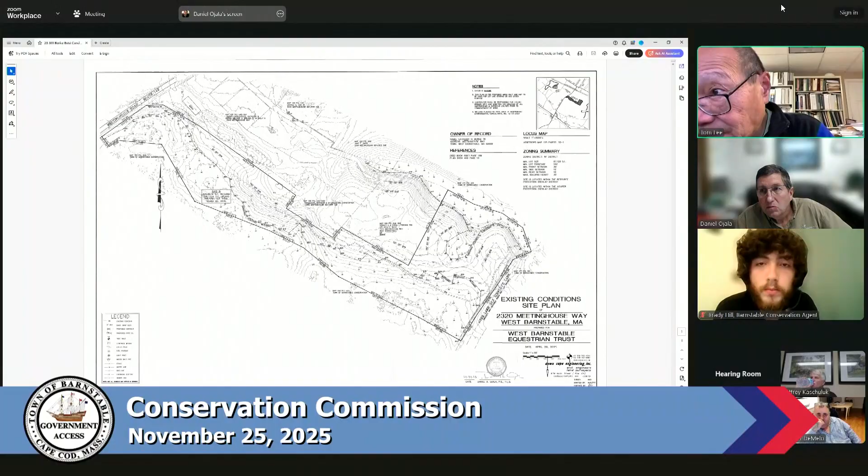Thank you. Any questions from the commissioner? None? It's pretty straightforward. Channel 18, any public comment on this one? Seeing none, could I have a motion to approve this project as a negative determination?

So moved. Second. Roll call. Abodeely, aye. DeMello, aye. Kaschuluk, aye. Lee, aye. Sampou, abstain because I was absent from this. Tangney, aye. So that's 5 and 1 abstain.

Thank you. Good luck. Excellent. I appreciate your careful consideration, and thank you.

We have 3 NOIs, and the first one is 207 Crystal Lake Road LLC to demolish existing dwelling and construct a new dwelling with all associated appurtenances and proposed pool at 207 Crystal Lake Road, also as shown on Assessors Map 139, parcel 054. John?

Good evening, John O'Dea from Sullivan Engineering Consulting, representing the applicants. I will share the plan with you.

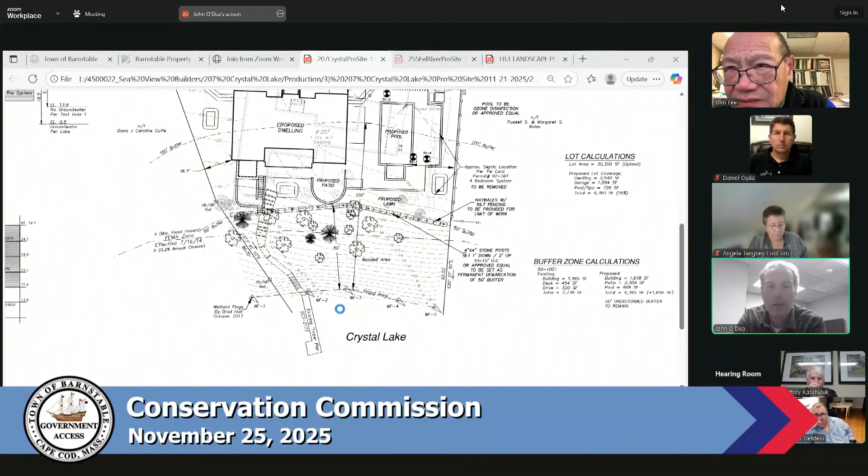As you stated, this project's at 207 Crystal Lake Road. It's a parcel of land, a little under an acre, that abuts Crystal Lake. Our wetland resource would be the land underwater body, and then an inland bank along it is what we took our buffer zone from. Site's developed with a single-family dwelling dating to the 20s. It's seen better days if you've been to the site. We have an undisturbed 50-foot buffer.

We're proposing to demolish the house, build a new house generally where the main box of the existing is, and a pool to the side of it, kind of generally where the existing garage's end of the house is. All work's outside of the 50-foot buffer. The existing undisturbed will remain. We've got a limit of work set up, drainage taken care of, pool disinfection specified. I hope that this is a pretty straightforward project for you all.

Thank you, John. John, I think I need a revised plan to show the dimensions, some of the building stuff. Right now there's nothing mentioned in there. We could give some overall pool and building dimensions to give a better scale of it. We did have all the offsets to the property lines to locate it, but we could certainly do that.

Okay, question from the commissioner, Angela. Yeah, I have 2 questions. One, you're not removing any trees, correct? No trees in the 50-foot buffer. There is 1 tree here where the patio is. So there is a couple of trees landward of the 50-foot buffer, but nothing within it.

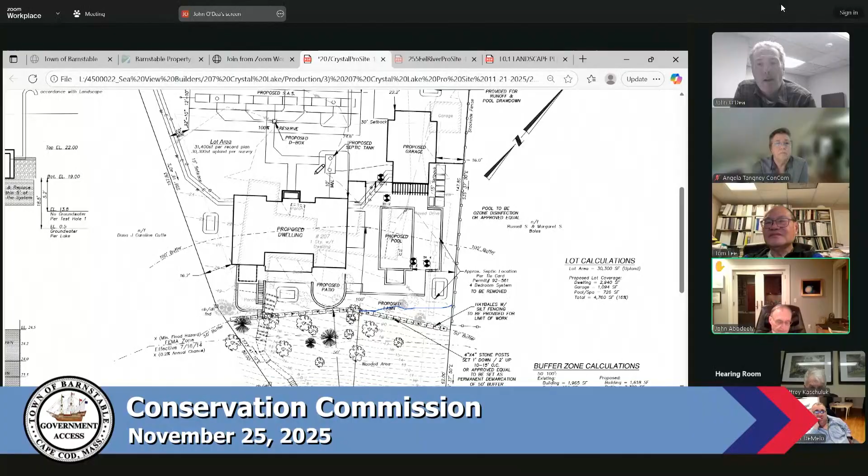So I'm a little concerned that you are literally touching that 50-foot, which should be demarcated, I assume. That is on the plan. And so I kind of agree with Angela. I think if there's some way to pull that back 10 feet or 5 feet at least, I think that would be necessary. I think we can certainly pull the limit of work back as we discussed there on that eastern side. Our excavation, heavy equipment or whatever, I mean, we're probably 20 feet past the limit of work.

There's a little bit of a patio arc there that's getting close to it, but I don't think that's digging a foundation or anything of those sorts.

So, then I need your assurance that there would be no intrusion beyond the work limit line into the 50-foot buffer zone, period, under any circumstances. Again, I'm not a contractor, but I just get a little concerned.

You put the proposed lawn right up to it, and the proposed patio was literally touching the work limit line. So I was just a little concerned with practically how you're going to do that without invading the 50. I think that's where I sort of think, Angela, that's kind of where you were going with your concerns.

Exactly, yes. Other than that, I'm okay with it.

I think that we could certainly reinforce your concern there with more than just the labeling, here's the hay bales. I think we could certainly put an additional note on there that there can be no disturbance beyond this limit of work. Right, because if they accidentally make a patio a little longer, it's in the resource there forever.

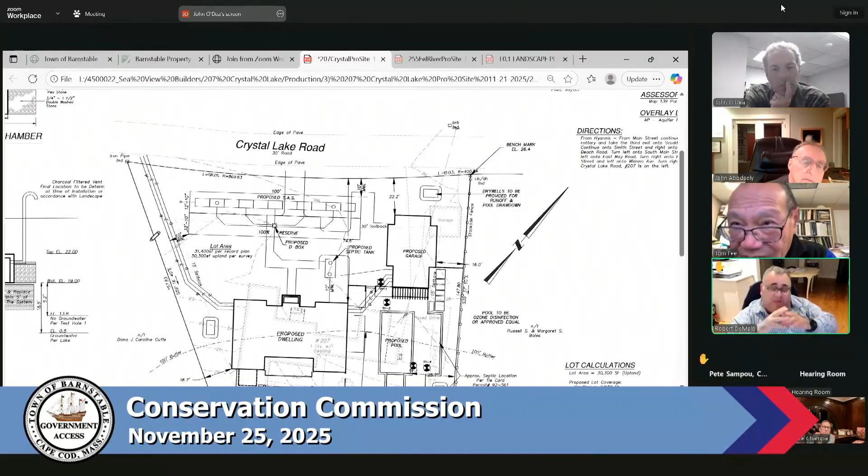It's all falling apart as you stated. But my question is, is there any way, I'm kind of repeating what everybody said, but can we pull that whole house and pool and everything closer to the road a little bit? Why does it have to be that much structure between the 50 and the 100? That's my only question, there may be a reason for it.

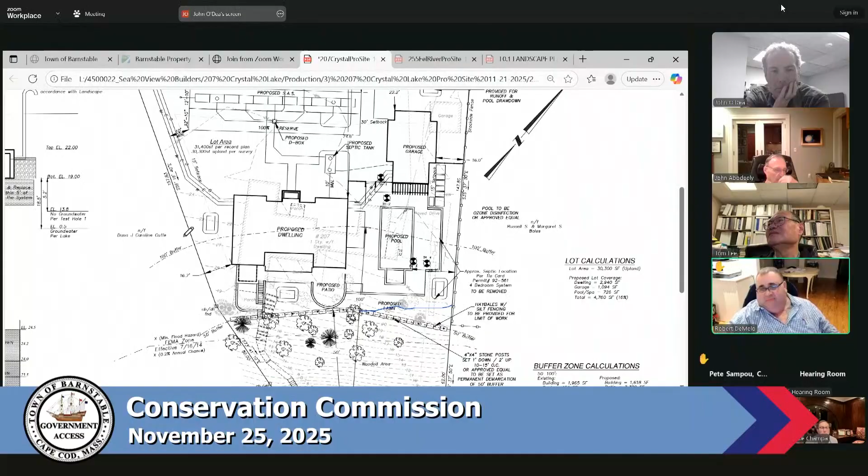The view, whatever it may be, but it's such a huge front yard, and we're pushing everything right up to the limit. I don't know, I think you could go forward 20 feet, because I was out there looking at it, bring the house forward 20 feet, the pool, the garage. I don't know, I'm just asking a question.

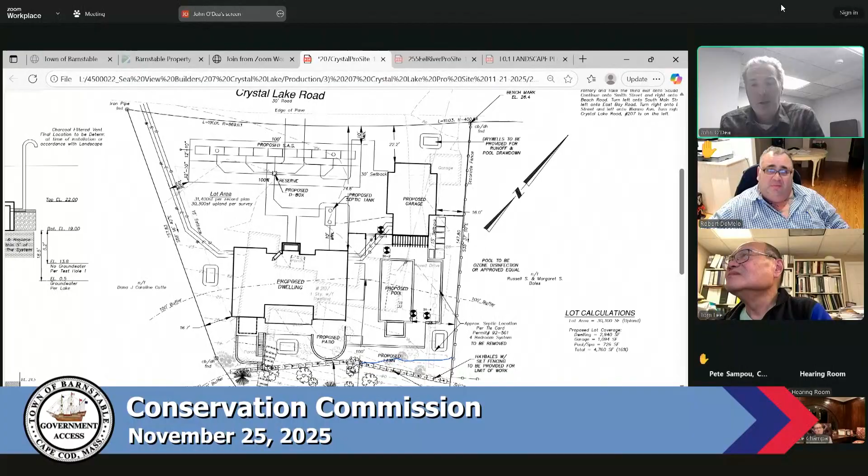And I don't see a planting plan, so what are we doing for plantings? We're not doing any plantings because we have a 50-foot undisturbed buffer. I think that is sort of a leading point of this project, that the commission's regulations basically presume that if there's a 50-foot undisturbed buffer, then a project would not have negative impacts on the wetland resource.

Our house is where the house is, you can see the existing line of the house. We're putting the house back where the house is, would like to keep it in proximity to the lake. We understand that in doing that we don't really get a backyard, and I think that's kind of why we've got it set up as a patio area, so that it's not a lawn that's stretching anywhere.

Okay, that was my question. Is there a demarcation on it, Tom? We do have that noted over here of 4x4 stone posts, 10 to 15 feet on center along this line.

Mr. O'Dea, just assure me and my fellow commissioners that there's not any heavy equipment gouging, trampling, or compacting the roots of these trees that are at 50, 51 feet. I'm perfectly fine with this as long as, because I've got trees right across my street where they brought in heavy machinery, and there's not going to be a tree left alive with the treads going over these roots. So assure me that heavy equipment is not coming close to the 50 foot line, and that these trees right at this edge will remain alive without stressful root damage.

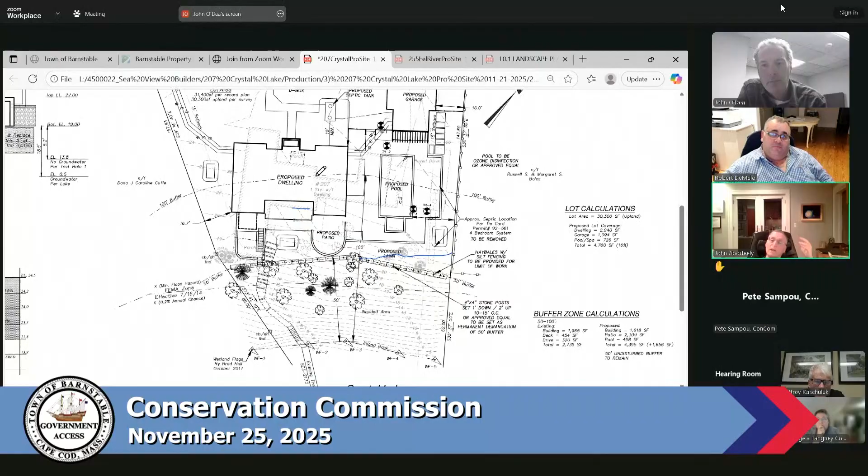Thank you. What about a condition in there that in the event there's damage, the trees will be replaced? If we added that condition, Pete Sampou? Yeah, but you're not going to replace one of these big trees with something you can bring in there and plant. No, that's true.

Any other question from the commissioner? So John, I don't foresee an issue with any root damage. This is going off a slope, so the base of these trees is probably 2 or 3 feet below where the grade is up at this patio. The heavy equipment is more where the house is, as opposed to the patio, and the excavation would really be at the house and the pool. Okay, thank you very much, John.

Any other question from the commissioner? Channel 18, any public comment on this? Seeing none.

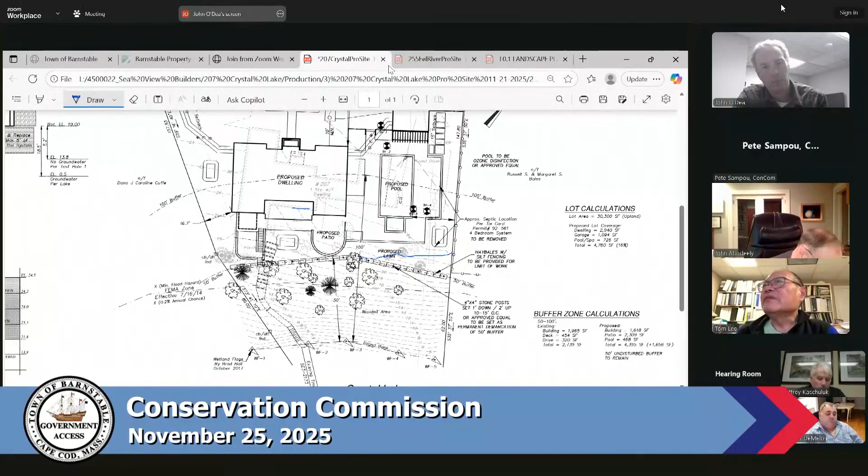Could I have a motion to approve this project subject to receipt of a revised plan showing relocation of the hay bale lines on the east side of the lot, plus a dimension labeling the distance from the resource to the top of the proposed patio area? So moved. Second. Roll call: Abodeely, aye. DeMello, aye. Kaschuluk, aye. Lee, aye. Sampou, aye. Tangney, aye. That's unanimous, Mr. Chair.

Thank you. The next application is from John M. Jr. and Kimberly H. Toomey, proposed landscaping retaining wall to level an existing lawn area at 255 Eel River Road, Osterville, as shown on Assessors Map 115, Parcel 005. John?

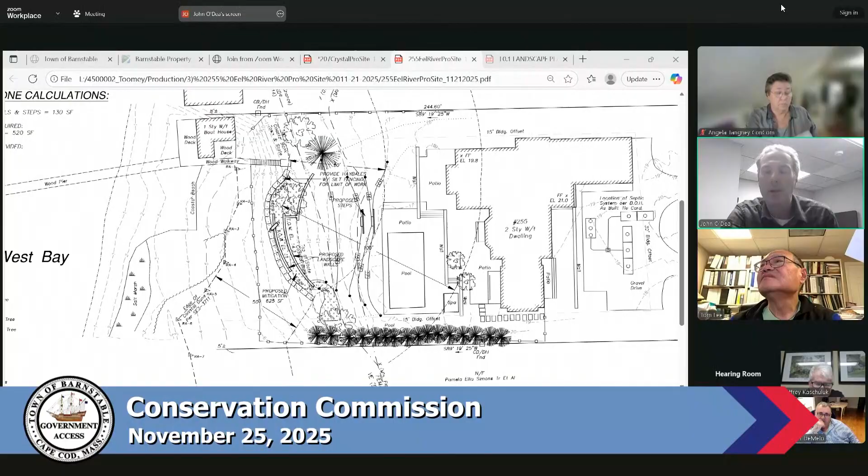Good evening, John O'Dea from Sullivan Engineering Consulting, again representing the applicants at 255 Eel River Road. We have a property a little under an acre, abutting West Bay. There's land under ocean, coastal beach, and some salt marsh. There had been a coastal dune here; the upper beach isn't very undulating, but we held that resource delineation. There's a town-defined coastal bank above the existing boathouse. The slopes taper off and become a state-defined coastal bank on the southern two-thirds of the property. There's an existing dwelling that was rebuilt in 2005.

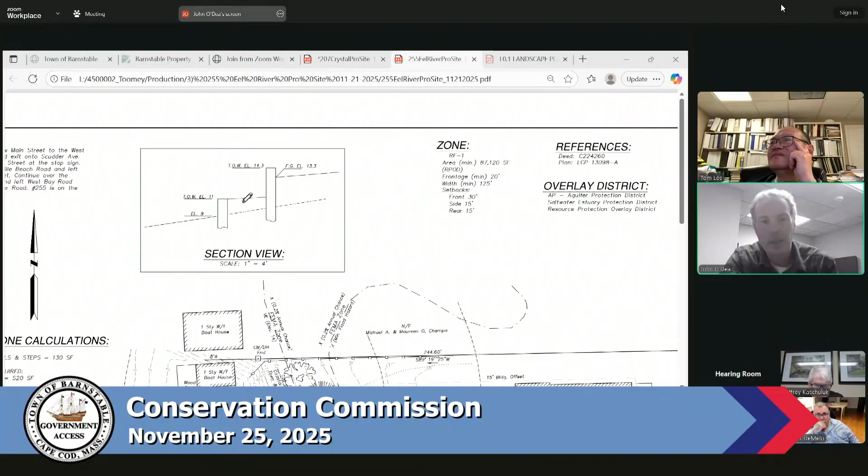Our proposed project is to construct landscape walls to flatten out the lawn, make it more functional and appear better. Those walls are located within the existing lawn area, designed as two lower tiered walls with a cross section shown in the corner, creating a slight grade change. We've added the proposed contour: this proposed 14 contour follows along the existing 14. We're cutting the grade above it about a foot and filling the grade below it about a foot — a pretty minor change in the overall landform.

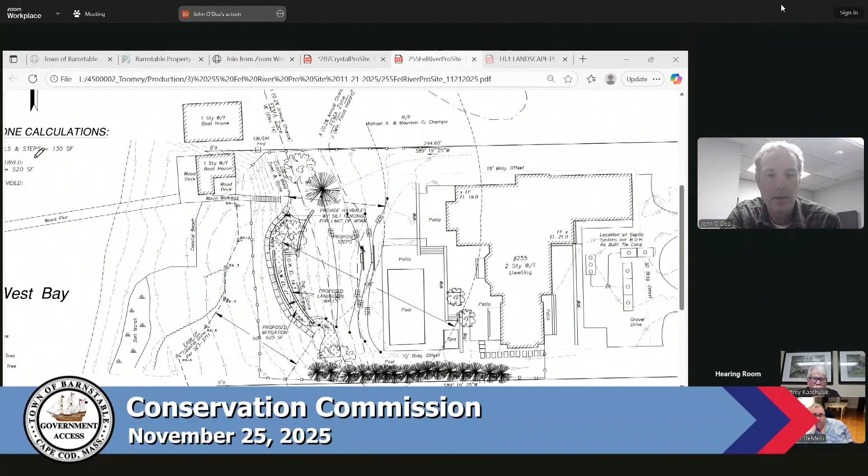We have provided buffer zone calculations and are providing mitigation for the slight increase in hardscape. I don't think this will have any impact on the stability of the coastal bank, or on the beach or marsh located by the water's edge. We hope this can be a good opportunity for them to improve their yard while also making improvements in the buffer zone for the commission. I'd be happy to answer any questions. Thank you, John.

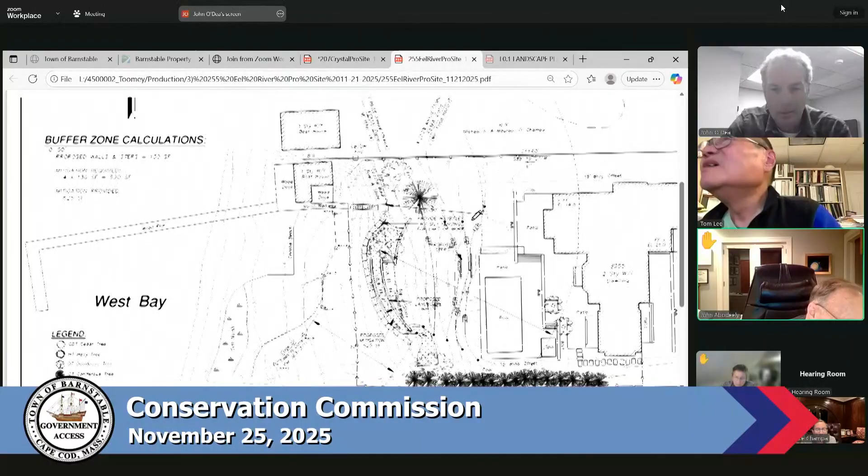The heights of the walls are what, based on these elevations you provided? So the lower wall is basically two 2-foot walls. The base is at 9, the top is at 11. The upper wall is more set up to be like a sitting wall, so the face of it will be a little over 3 feet, but the actual retainage is about 2 feet.

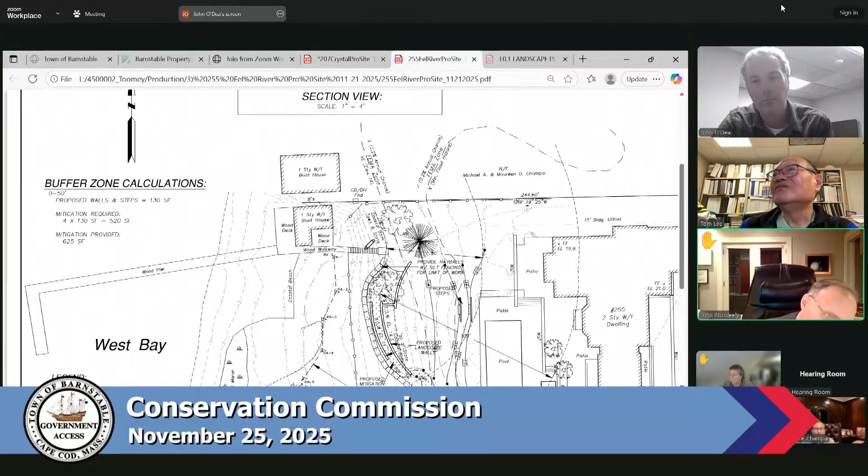Okay, second question, because this is a pretty good slope. When I was walking that, the lower wall is literally touching the vegetation right along it, not the buffer zone itself. So I got a little nervous about protecting that vegetation.

How many cubic yards of fill are you going to have to bring in there after those walls are built? I've estimated it's about 20 yards. We're cutting the upper half of the lawn, and these little steps down kind of assist in cutting the grade. So we're cutting the top half and filling the bottom half. It is about 20 yards.

About 20, okay, that makes me feel a little better, because if you use the existing slope of that yard and the height... Yes, and I think the cutting was something added into the design. It started off as just being a filling, a one wall, and they've tried to work to soften it in every direction they can.

The other thing I wondered, because of the slope, and there was pretty good vegetation there to the west bay, was whether leveling it off and putting in those walls, plus the additional mitigation between the first and second wall, would actually work. So I concluded that probably this is an environmental gain in my mind. I don't know if some of the others would disagree, but that's the conclusion I ended up with as I left there.

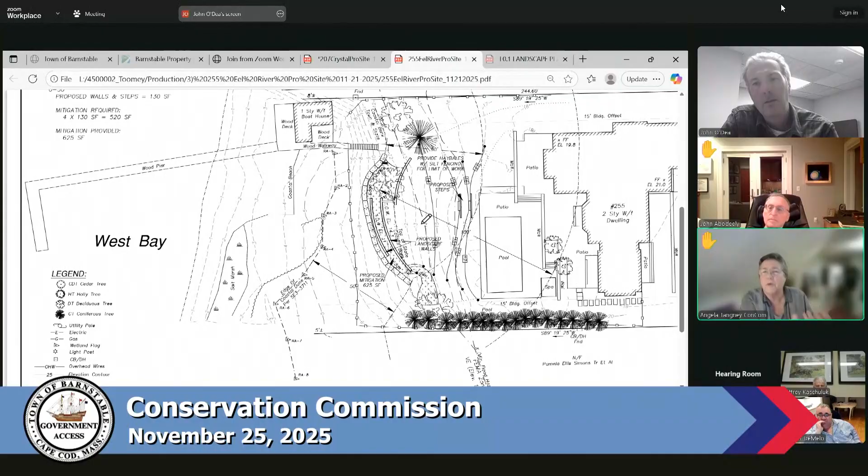And then I didn't quite understand the need for the lower wall in that resource area. It's somewhat disturbed, but I just don't understand why you need a lower wall. And what were you going to use for fill, just fill it up? I'm sorry, I don't understand the project even after I walked it. Can you explain again why the need for the lower wall and why we need to be in that resource area at all? So we felt as a team that having a tiered wall was less impactful.

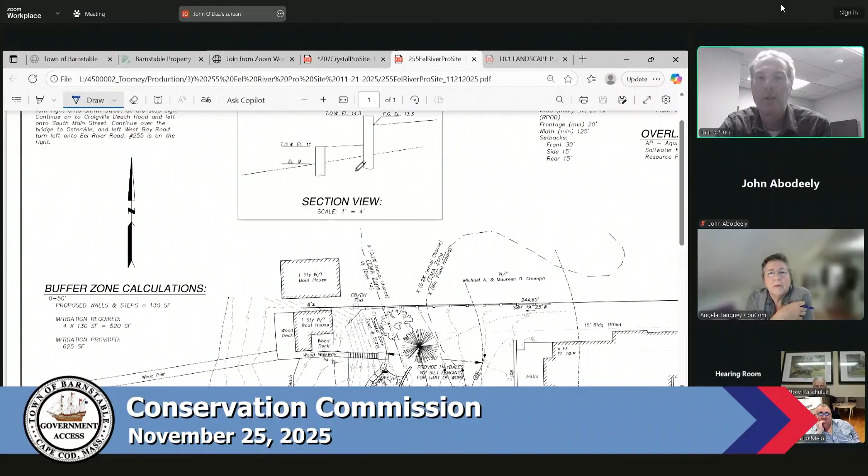Having a 2-foot wall, I don't know that anyone would ever even see this from the ocean behind the vegetation, but that was just our philosophy going in. This was to try not to build big walls. We set it up as this terraced situation so that we could accomplish that with 2 smaller walls. And again, this is working within the existing lawn area.

Right, I understand the upper one, I just don't understand the lower part. And the lower part is in the existing lawn too. So they're right next to each other and you're just going to fill them right in the lawn part. That's correct. Okay, got it, I understand that better now.

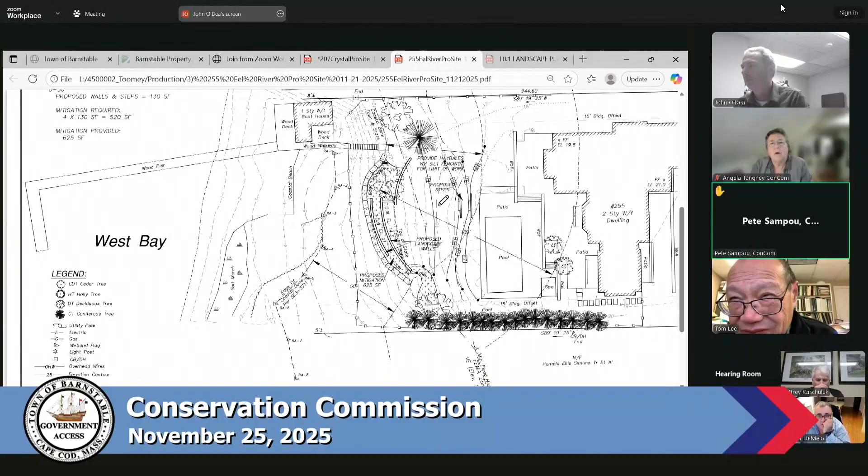Mr. O'Day, quick question here. Now, your lower terraced area, the one folks have been talking about, elevation 9 goes up to elevation 11, you've got that area flat. Is this an area that will be used by the owners so that it's very important to be flat?

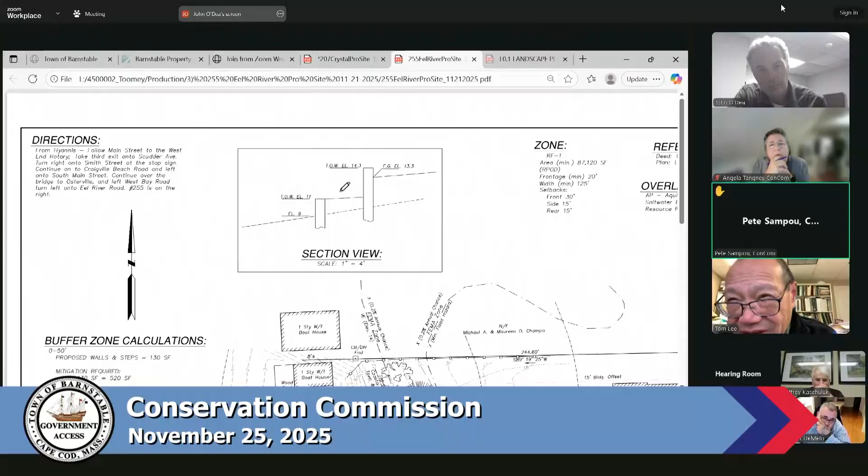Or my question being, could less fill be put up there if that lower wall was only 12 to 16 inches high and you had a slight slope up to the larger wall that is providing the flatter area for the applicants? That's my question, thank you.

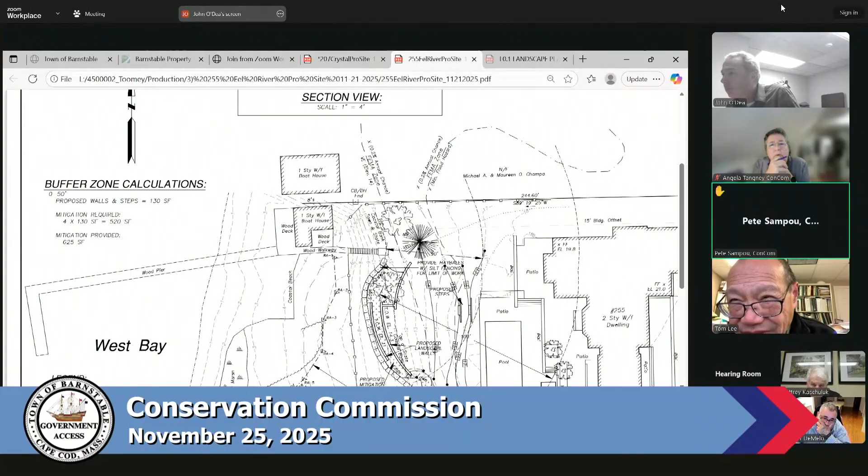So the space between those walls is really only 4 feet, and it is to be planted. So this will not be a used area whatsoever.

Could they make up a couple of inches between those in that 4 feet to either lower the lower wall or have less reveal on the upper wall? Maybe, there's not a lot that I think could be accomplished, but give that a thought. I really don't see the necessity of having it really, really level between those 2 walls. I'm not a horticulturist, I'm not planting the stuff there, but I really don't think you need it to be absolutely level.

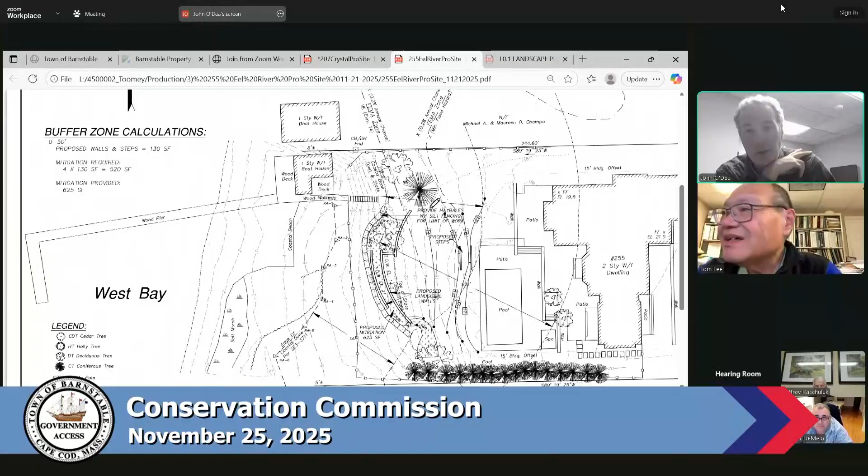I think Commissioner Abodeely walked through his thought process, and hopefully ours was clear in the narrative. We think flattening the lawn will lessen runoff toward the resource. We think the mitigation is important, and it's all within the existing lawn. We're not disturbing any of the natural buffer zone, we're within the existing lawn. We're reducing potential runoff, adding mitigation which will be better for infiltration, and we'll have some wildlife habitat. So I appreciate your concern, but that was our thought process.

We took some steps to even get it to this point, trying to minimize what we thought could be impacts out there by lowering the upper grade so we're not bringing in much material. Although it's more square footage, meaning more mitigation, we felt the terrace walls were less of an impact in different ways.

Thank you, John. John? I've got a granddaughter who just walked in. Go away. Sorry about that.

Yeah, again, John, it was funny because when I went out there I said, my God, why are they doing that? It's going to be in the 50, blah blah blah. But then I sat and looked at what exists now, and the fundamental legal question is: can this project be conditioned and done such that it does not impact negatively? Our goal as a commission is even more than that, if we can, to say does it in fact have a positive environmental impact? Then when I saw the lowering of the lawn, the leveling of that area, because there's a good slope right there, the runoff is going to be significant.

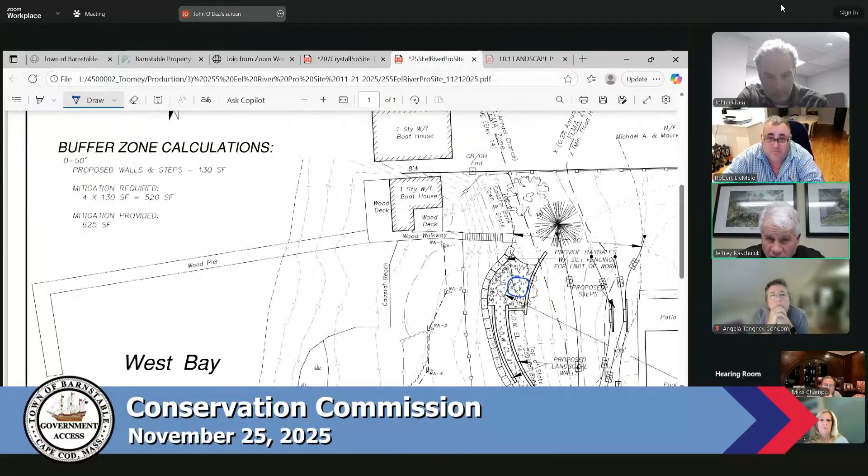We range from like 6 inches to 18 inches inside of the edge of lawn. That makes sense. That looks bigger than 6 to 18 inches. The lower wall to the edge of the grass. Yes, I think the limit of work is basically set on the edge of the grass.

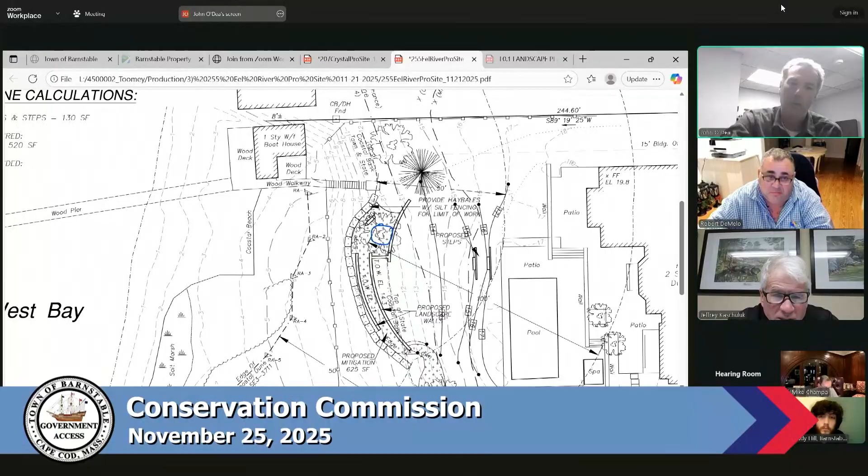Well, the suggestion is: am I looking at 625 square feet of proposed mitigation? Yes. Why not fill from the limit of work? I don't know what that square footage is, but Bill and Pete and John, Angela - they're always all over this. Make that entire bank mitigation.

It is pretty well - I don't know if you get out there, Jeff, but it's heavily vegetated now. That was one of the things I looked at, and then I walked down, probably like Angela, walked down to the beach and looked back up at that. So he's got grass right up to it, and then it's fairly heavily vegetated all the way down to the water's edge, except for the beach.

No, I see that, but I'm looking at the work limit line. Okay, I guess maybe I'm misunderstanding. Sorry, no - I'm talking about taking it from the work limit line right to the edge of the wall, the lower wall. Well, it is - I think that if there's any disturbance below the wall, that would be between the wall and the limit of work.

And even when the hay bales come back, I think certainly additional plants could be put back along this area. The hatching doesn't even fit on the 20 scale, but we could certainly do additional plants in that. There will not be lawn left there.

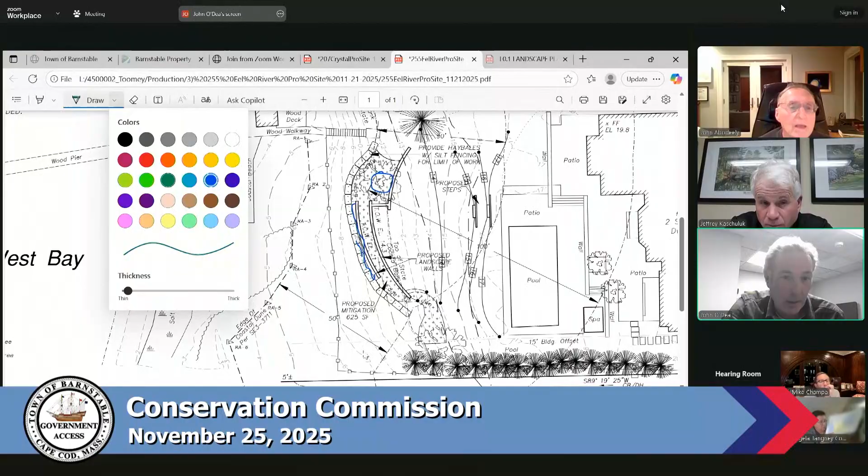John Abodeely, the area I'm specifically talking about on this plan is where the wording says proposed mitigation 625. If you look due north of that, that entire scope - maybe I can't feel the... I think that this is... I should change the color. I think that the lawn actually jogs up there, and that's why our line sort of - that's the edge of the lawn.

So there will - I think to answer Jeff's question, if you build the lower retaining wall, that means you need to dig that up to get the foundations for the lower retaining wall. So on the back side or the front side of the retaining wall there would be some excavation and backfill, and you may need some vegetation restored with the mitigation area. Right, I don't foresee any issue with that, because that lower wall is literally right against existing vegetation. So I think there is going to be some damage here and it does need to be restored, as well as the new mitigation.

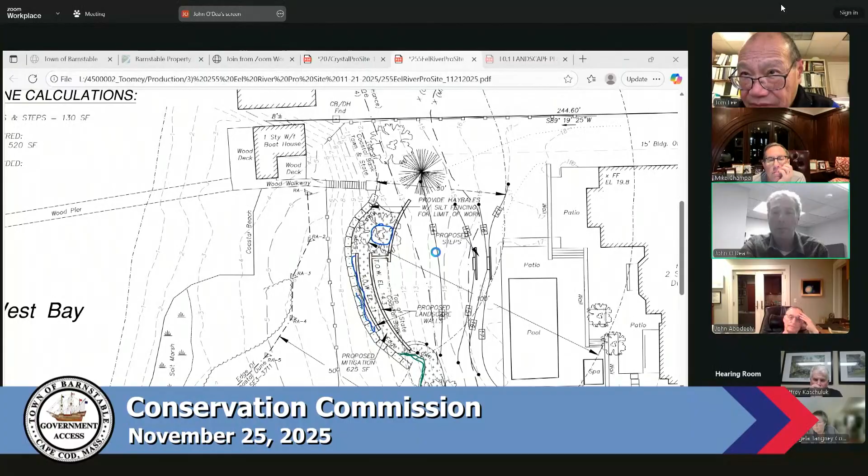I'll share the plan again. So the grade is really just changing in the center of the property, and the proposed contour lines, as minimal as they are, I would say are concave on the property - is that the right word? So any water is just directing towards the walls, not changing any runoff towards either side. There's really no work within 30 feet of either sideline that would impact runoff.

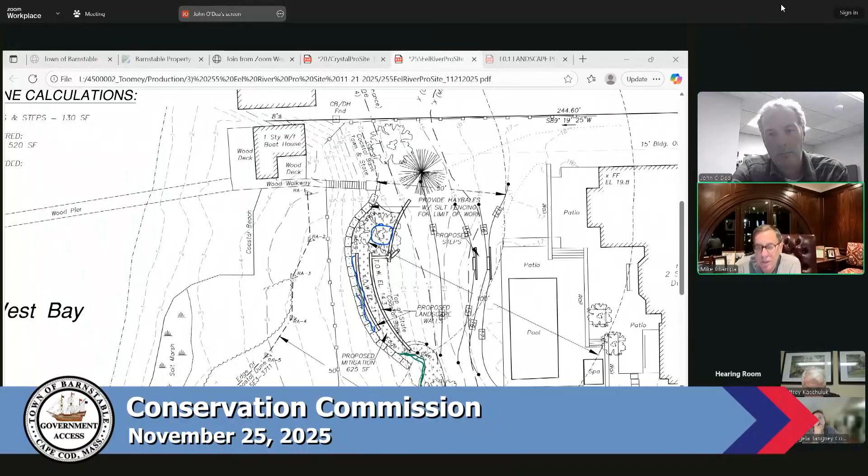Okay, that does make sense, and that's true, I'm assuming, on the south side as well. Both sides, both ends of walls are about 30 feet off the lot lines.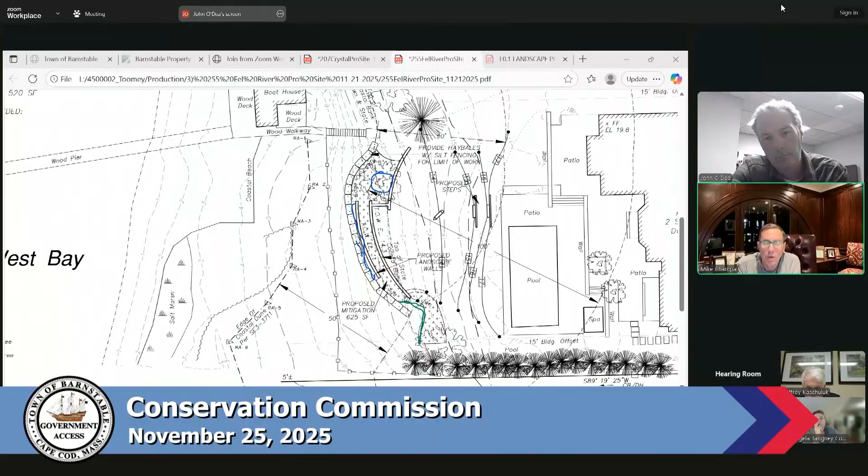And one final question, if I may. You're going to bring in, I think I heard, a fair amount of fill. Is that going to be coming in between the property line and the 15-foot buffer between the properties? How are you going to get - I mean, that's a lot of equipment and trucks going in and out, I would assume.

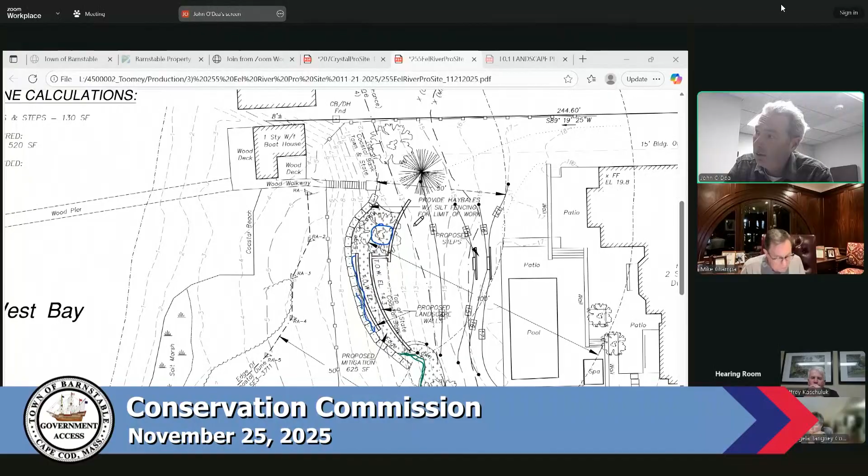I don't think that they'll get trucks back there. I think that this will be done with smaller equipment, a skid steer or something. I have not had a discussion on whether it's going on the north side of the house or the south side of the house, but it would not be going with trucks near the property line in the 50-foot buffer. Again, if it came on the north side, it would sort of just follow that grass line coming into the backyard.

Okay, I have no objection. We have no objection to this project. Thank you, beyond the concerns about drainage.

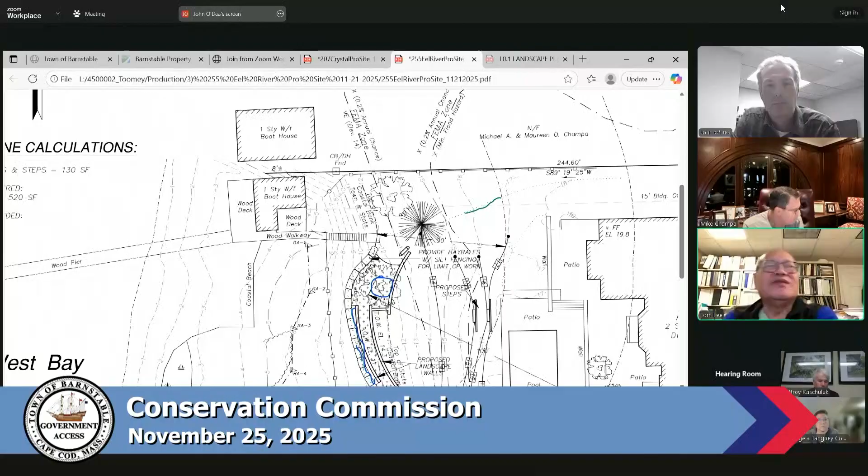So John, I'm looking for at least a minimum of a revised plan showing the distance between RA3 to the lower retaining wall, and maybe RA4 to the lower retaining walls for the distance, and then for any damage on the front or the backside of the lower retaining wall, you need to mitigate it, you need to plant it, and then report for 3 years. And the staff should check the file on the coastal beach locations, whether it was previously permitted or not.

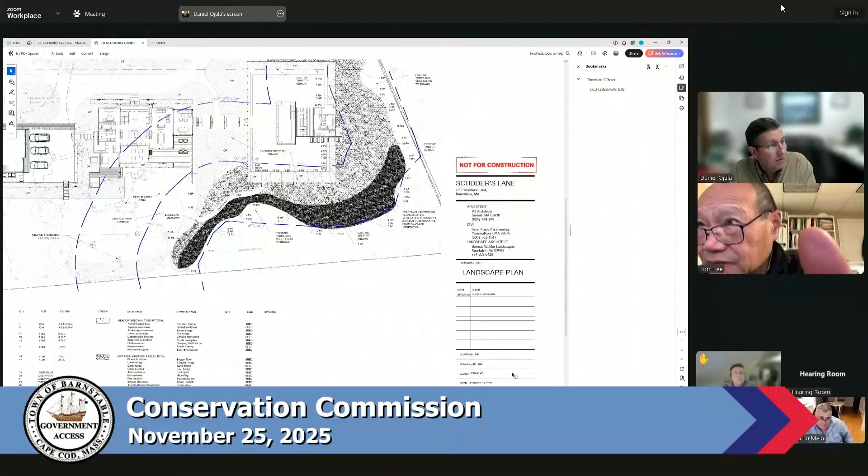First of all, there's a beautiful magnolia out there. It's absolutely stunning, and it says right on here, existing tree to remain. I hope that's the magnolia I'm looking at. It's gorgeous, and the willow is nice too. Yeah, that tree is gorgeous, I'm glad you noticed it. That magnolia is to remain.

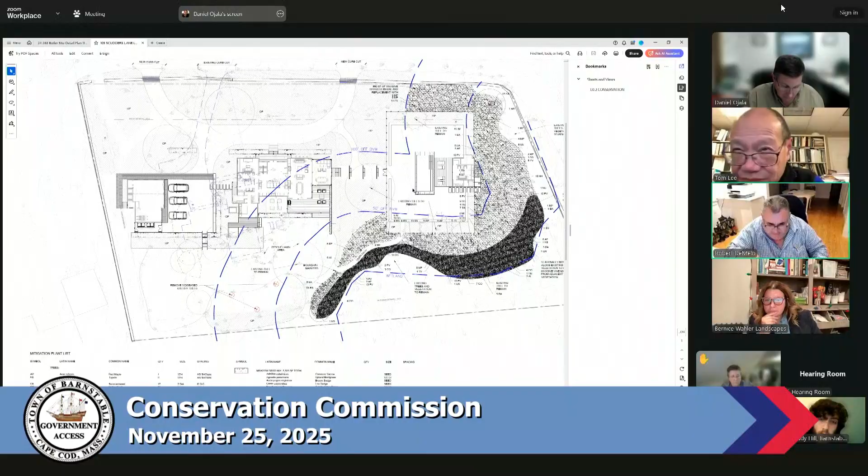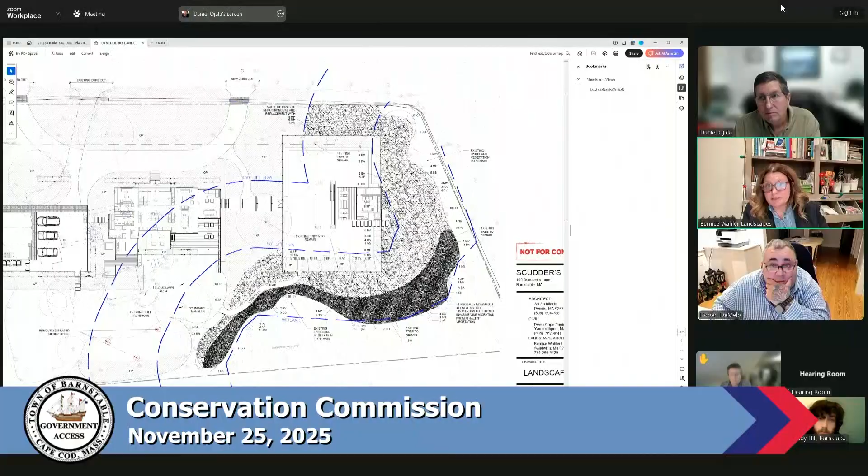Now, I see OP everywhere with the hash marks, and on the plan it says ornamental plantings. What does that mean? What are you planting in there? Those are yet to be fully defined by the clients, but a lot of the OP adjacent to and underneath the meadow or the magnolia, we're basically bringing that same meadow grassy language and forbs into that area. Our goal with this site is to transition the majority of that lawn into a more native planting palette. The OP is really just to help you discern what we're proposing as mitigation versus additional planting the clients are going to do beyond the mitigation.

Now, what's around the pool - is that all grass in there? That would be a lawn area, yeah, there is some lawn around the pool for usability. That's going to be a maintained, manicured lawn. Correct. And note 25 on the plan refers to pitching that all carefully into this area drain, which goes to a big subsurface dry well punched down through the clay, so it'll infiltrate in the chance there's some runoff. If there's a little fertilizer, it's a deep sump basin and not running into the wetland.

Did you say that it looks like it would be a perimeter wall, but is that what you said was going to be stone? Yeah, I can maybe help clarify that - think about it more as a gravel mulch. It's just an area of gravel on the ground that we use to help create definition between the edge of the lawn and our ornamental planting, so it helps define the lawn, creates a border, and also helps infiltrate any additional water coming off the lawn into the adjacent areas.

So is it just lawn? I'm sorry, is it just stone on the ground? Yeah, it's like gravel mulch. Gravel mulch, Rob, it's a drip edge - a gravel drip edge. But is there anything catching it underneath? It would just infiltrate, water that gets into there would infiltrate. If you were interested, we could actually put in a perf pipe or something to capture the water in there, if that was something you wanted.

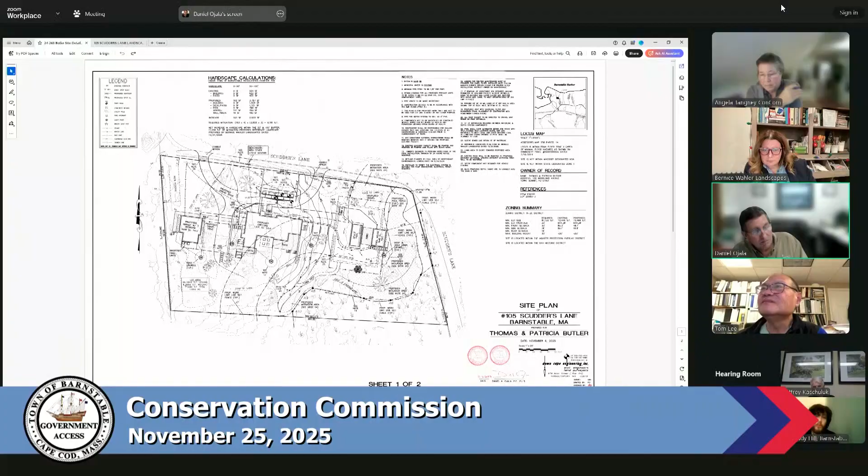That's all. I think it's such a de minimis thing when you look at it, and it does kind of square up—it's a nice symmetrical pool structure now. It'll probably catch the eye if we move it too much, so we'd respectfully ask to leave it there, being that it's really just a drainage trench of inert wash stone, which is better for the environment than lawn, probably. Okay, thank you, I just had to ask. Sure, no, it's well received.

Any other questions from the commissioner? Channel 18, any public comment on this one? Seeing none. None.

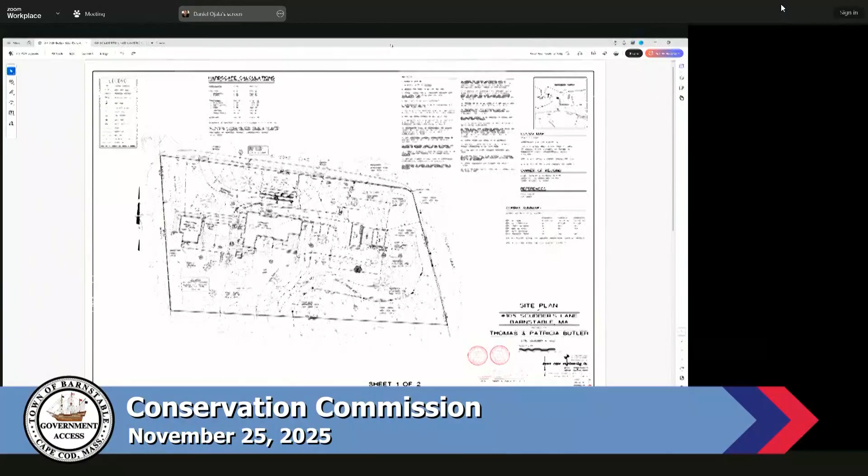Dan or Denise, do you need or want to have an ongoing invasive management condition? I wouldn't think we'd need that, being it's just a few honeysuckle bushes. It's not like Phragmites or something that's going to be really tenacious. So I think we'll be okay without it, but it's up to the discretion of the commission.

Because part of what you're mentioning is about the invasive, so that's what I'm asking. But I guess, Chairman Lee, if that was part of the required mitigation, maybe that would be something more appropriate. But here, where it's just a little bonus that we're getting rid of some honeysuckle and planting the area, maybe we could let it go without the expense of ongoing conditions. Okay.